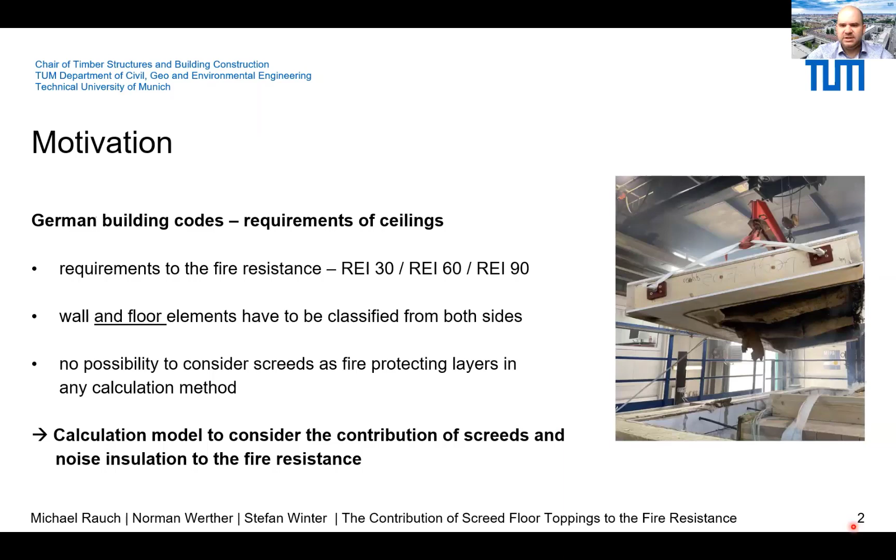Currently, there exists no possibility to consider screeds as fire protecting layers in any calculation method. Only tabulated data offer the possibility to consider these layers on the upper side of ceilings. So the idea was to develop a calculation model to consider the contribution of screeds and noise insulation to the fire resistance in future.

The basis for the calculation model is the structural fire design of ceilings according to the current draft of the EN 1995-1-2. There are two calculation models, one for the load-bearing capacity, which is based on the charring of timber, for example, for timber frame assemblies or for CLT elements. And for the integrity or insulation, there exists a calculation model based on the separating function method, which is a layer by layer calculation method. You can see it on the right.

For all the layers in the construction, we calculate a protection time with a temperature criteria of 250 Kelvin. And for the last layer, we calculate insulation time with a temperature criteria of 140 Kelvin in the middle and 180 Kelvin at one point, maximum temperature increase. The sum of these times leads to the insulation time of the whole element.

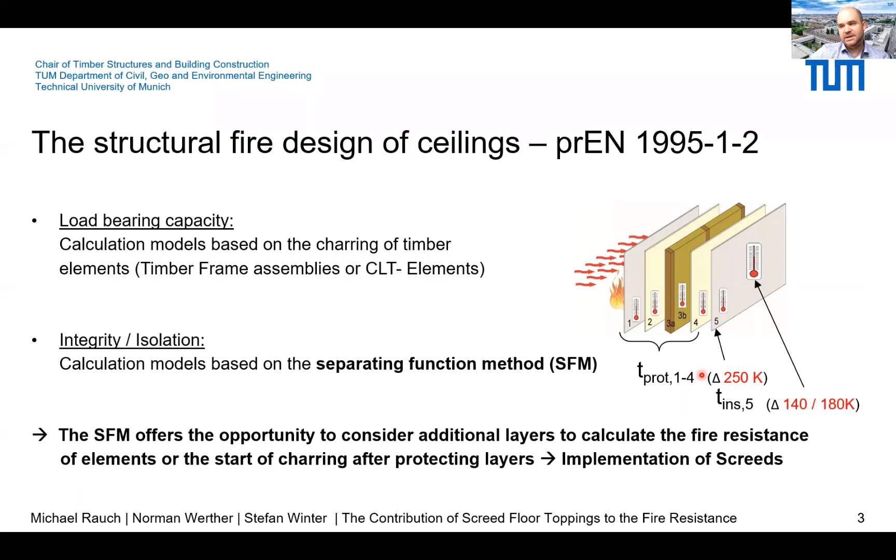And this separating function method offers the opportunity to add new additional materials to calculate the fire resistance of elements or the start of charring after protecting layers. So the implementation of screeds as protecting layers for ceilings is possible in this method. But no values for cementitious screeds could be found in the literature, which can be used for these calculation models.

So the first step of the study was to do some small-scale tests to measure the heat transfer and the temperature profile behind the layer of screed and noise insulation. Based on these tests, input parameters for the numerical simulation could be derived, and some parameter studies were done. This is the basis to evaluate analytical equations to extend the separating function method of the EN 1995-1-2.

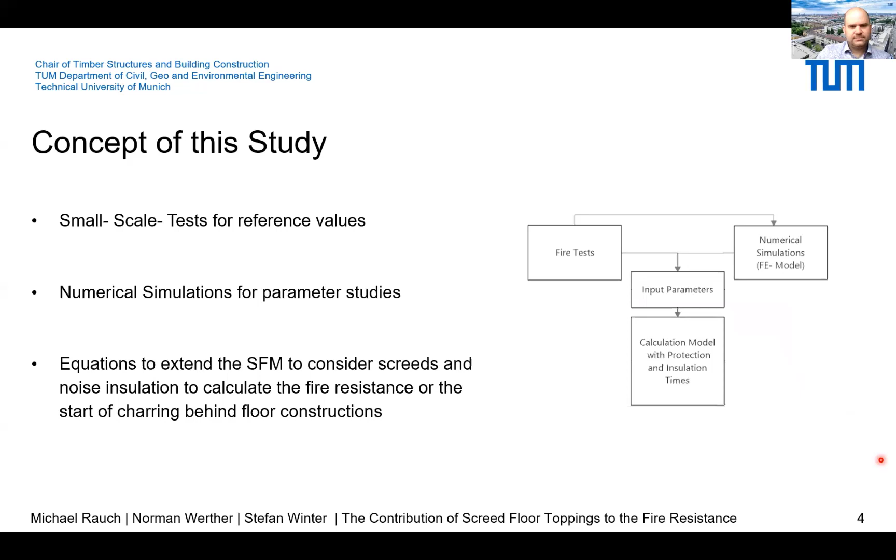The heat transfer through the screeds was measured in a fire test according to the German DIN 4102-8. The temperature in the furnace was measured by plate thermocouples according to the EN 1363. You can see it here on the right picture. And the furnace where we did the tests, you can see here in this picture. And in this picture, you can see the specimen with a dimension of 50 by 50 centimeters, where the heat transfer was measured.

The test specimens were mounted vertically because of the geometry of the furnace. This configuration is more conservative compared to the horizontal construction. To avoid the fall off, the screed layers were fixed by screws. Different thicknesses and backing materials, such as particle board or mineral wool insulation, were tested.

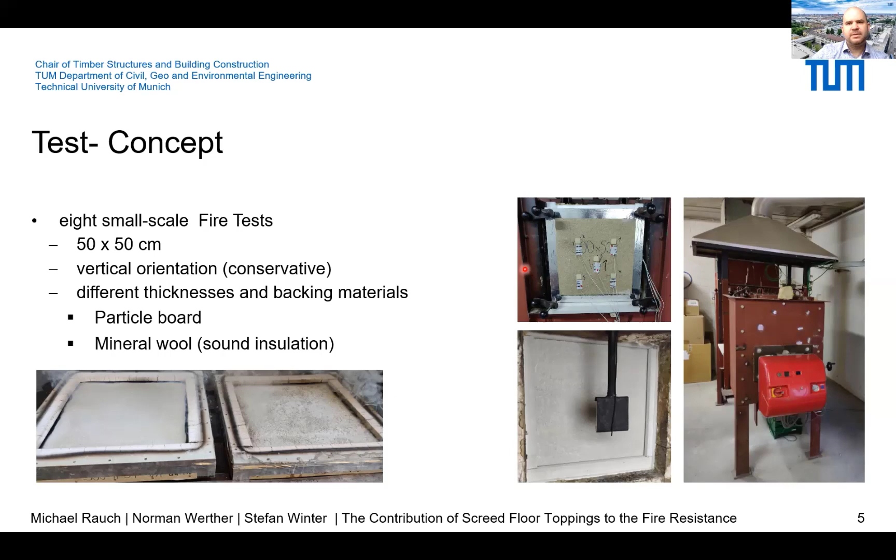The diagram on the left side shows the result of test 1 until test 4. For the protection time, the temperature of 270 degrees is evaluated and shown in the diagram for the different screeds and different thicknesses backed by a particle board. Tests 1, 2, and 3 were done with a cementitious screed, and test 4 with a calcium sulfate screed.

You can see that the calcium sulfate screed with a thickness of 35 millimeters has a protection time of 45 minutes compared to a cementitious screed with a thickness of 35 millimeters, which has a protection time of 30 minutes. You can also see the horizontal plateau of the calcium sulfate screed where the water of the gypsum evaporates. This leads to the longer time for reaching the 270-degree criteria.

All screeds in this test series were directly exposed to the fire and were backed by a particle board. In this diagram on the right, you can see test number 5 and 6, where the screeds were backed by a stone wool with a thickness of 15 millimeters.

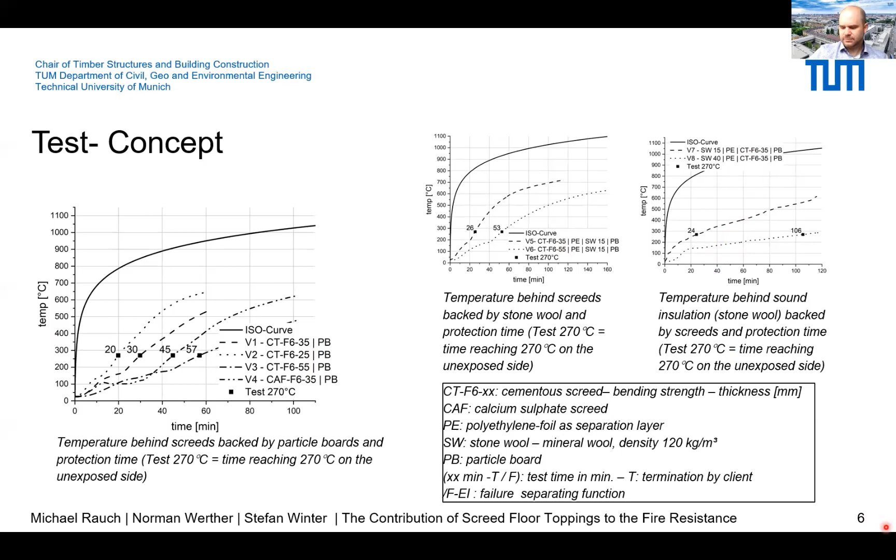To do numerical simulations, material parameters for screeds are necessary. Starting from the material parameters for concrete, according to EN 1992-1-2, the material parameters were calibrated based on test number 1. You can see it here in this diagram.

The multi-objective genetic algorithm integrated in ANSYS was used to optimize the material parameters for screeds based on the response surface method. Here you can see the response surface for the temperature evaluated at 1,800 seconds. The correlation of parameters shows which parameters are relevant and which can be neglected for this optimization process.

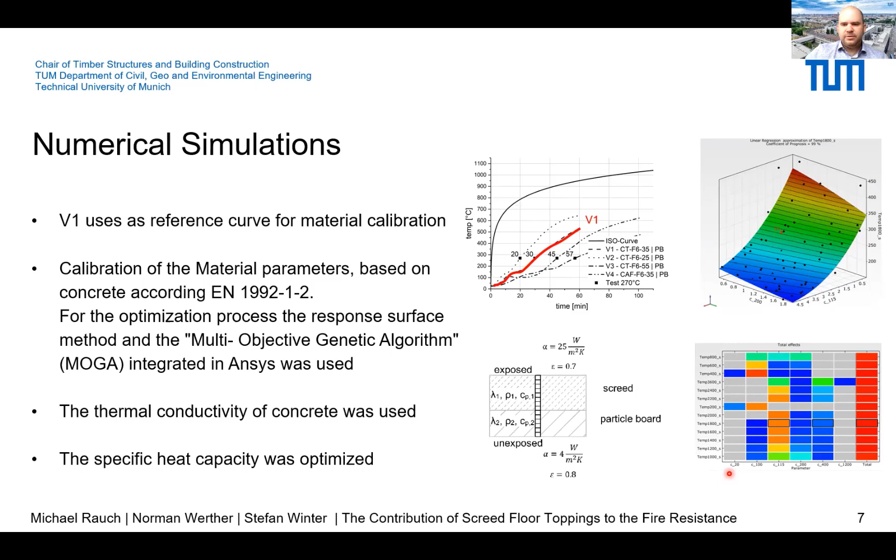Based on these results, the thermal conductivity of concrete was used and the specific heat capacity of concrete was optimized to be used as an effective parameter for the screeds. The results of the numerical simulation compared to the fire tests with different thicknesses show a good accordance. You can see the results in the diagram on the right.

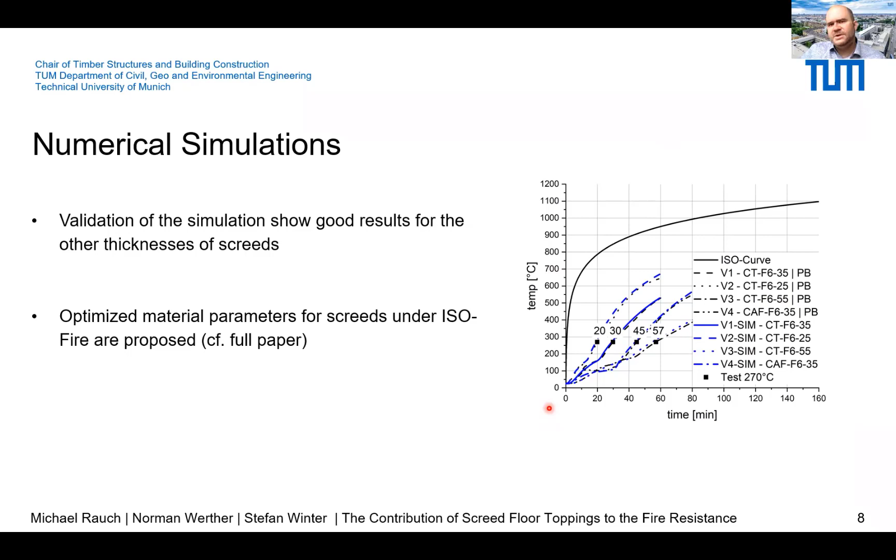The blue lines are the results of the simulation and the black lines are the fire tests. The optimized material parameters for screeds under ISO fire, which are proposed, are shown in the full paper.

Additionally, position coefficients and the K2 values to extend the separating function method were developed and are presented in the full paper. These equations offer the possibility to consider screeds in the separating function method or to calculate the start time of charring behind floor constructions with fire exposure from above.

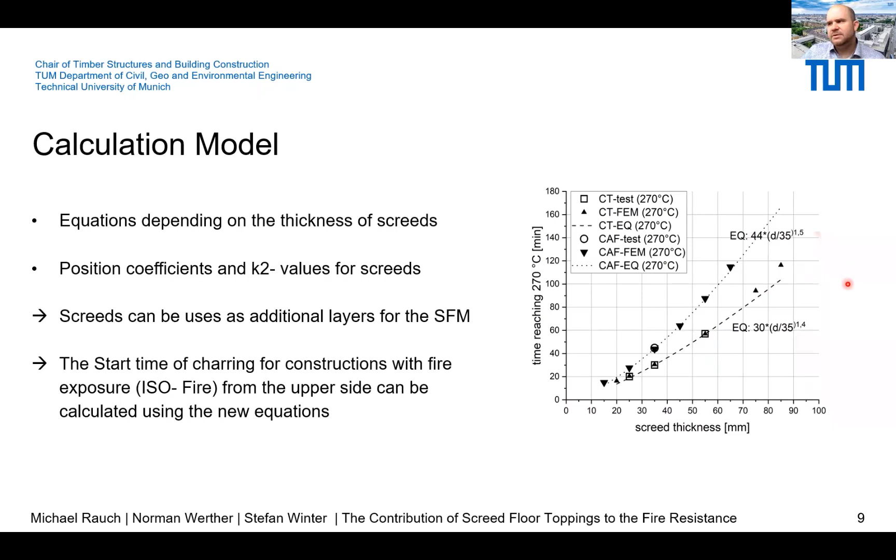The protective effect of screeds after reaching the temperature criterion of 270 degrees is considered by the K2 factor. The positive effect of the lack of oxygen is neglected in the calculation model. And so the K2 value represents a conservative result. These assumptions done in the study lead to a conservative model compared to the test results.

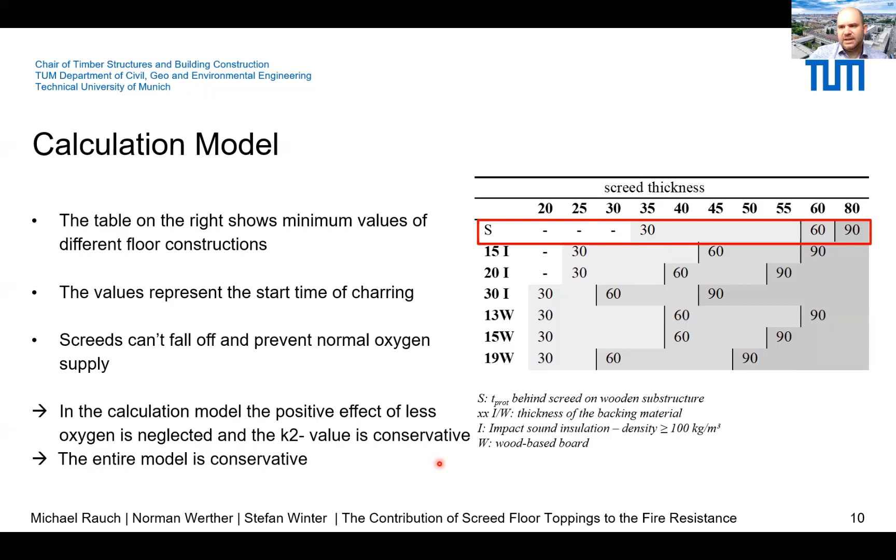In practice, many questions relate to the construction principles. If the screed is considered to calculate the fire resistance, all edge and movement joints have to be filled with non-combustible mineral wool with a melting point of more than 1000 degrees Celsius according to the German DIN 4102-4.

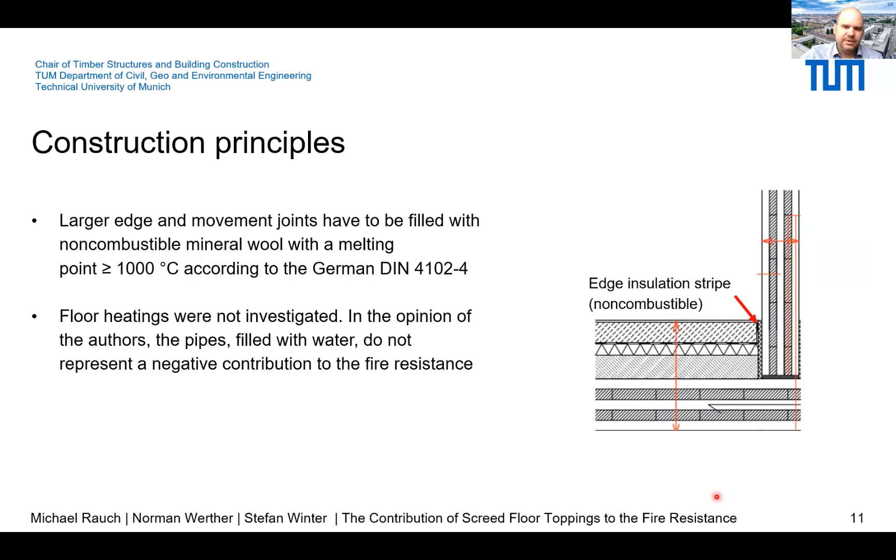In the opinion of the authors, the effect of the water-filled pipes of the floor heatings could be neglected, but these constructions were not part of this investigation. The summary and the outlook. The thermal material properties can be used for further numerical investigations in future.

The equations of the study extend the current separating function method in the draft of the Eurocode, and screeds can be used as an additional layer in the method. So it is possible in future to calculate the ceilings, for example, from above. For practical use, typical floor build-ups were summarized as tabulated data as shown in the slide before.

For German requirements from the upper side, the gap of missing data for screeds and noise insulation as individual layers could be closed with this investigation.